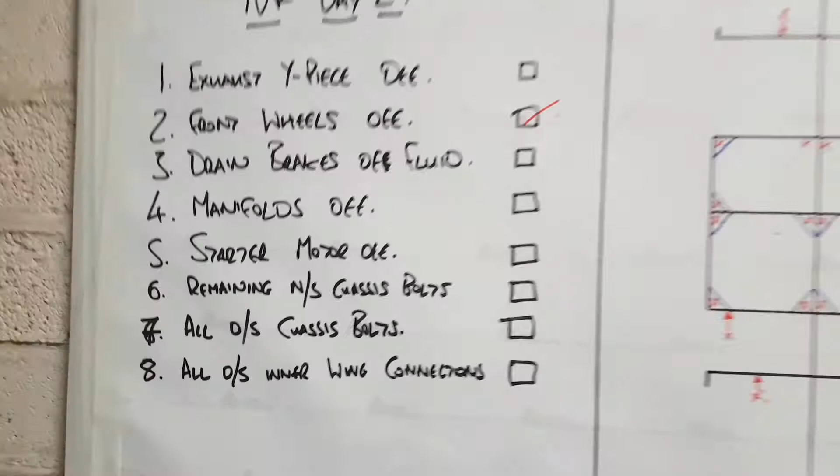So we moved on to day 2 of the TVR. Today we have a plan. I've started some stuff, just done that one. Yeah, so hopefully we should be able to get all those bits done today. Also done a chassis bolt diagram.

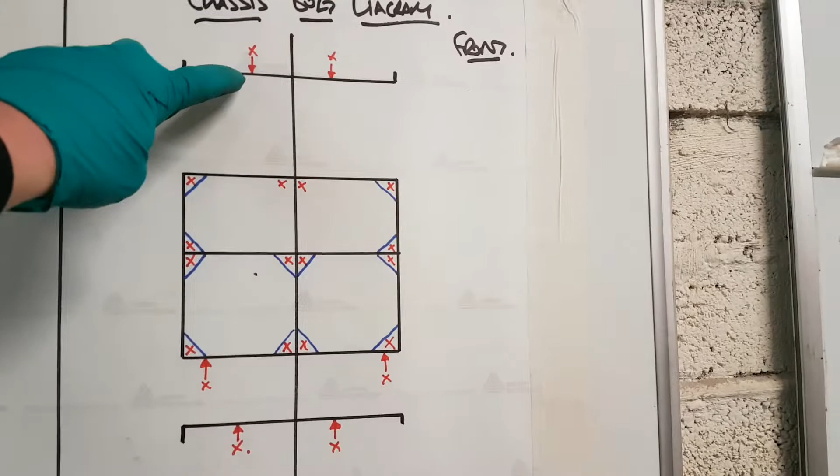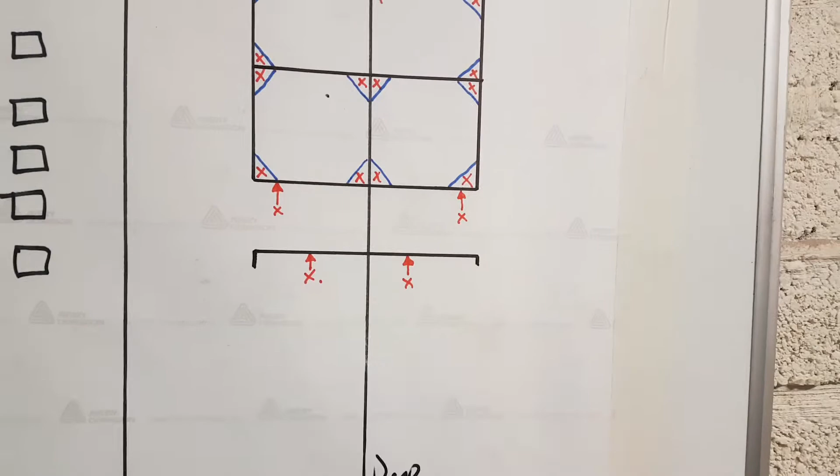So going front to back, you've got 2 under the radiator, 2 in the front of the footwell, 3 in the middle of the footwell, 2 in the back, well, not the footwell, behind the seats, 1 in the front of the rear wheel arch, obviously both sides, and 2 underneath the fuel tank in the boot. I think that's all of them. If there's any more, we'll add them to the diagram.

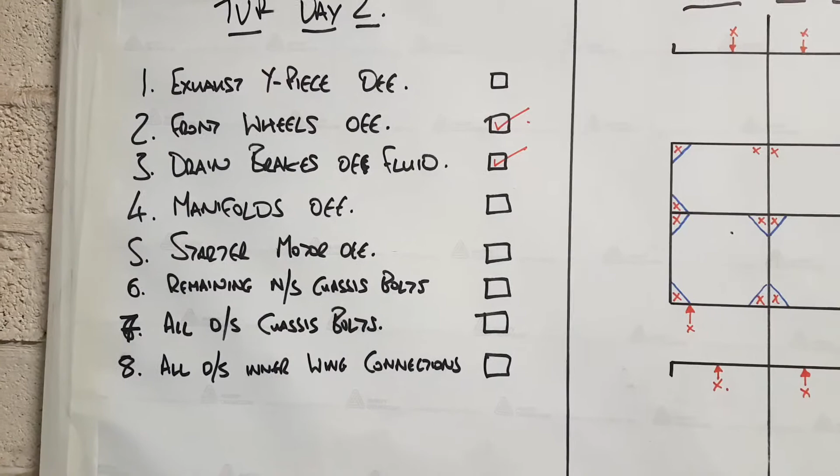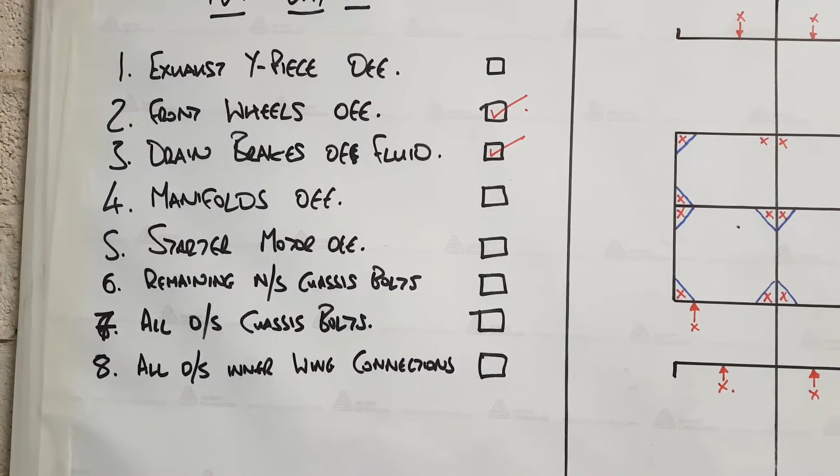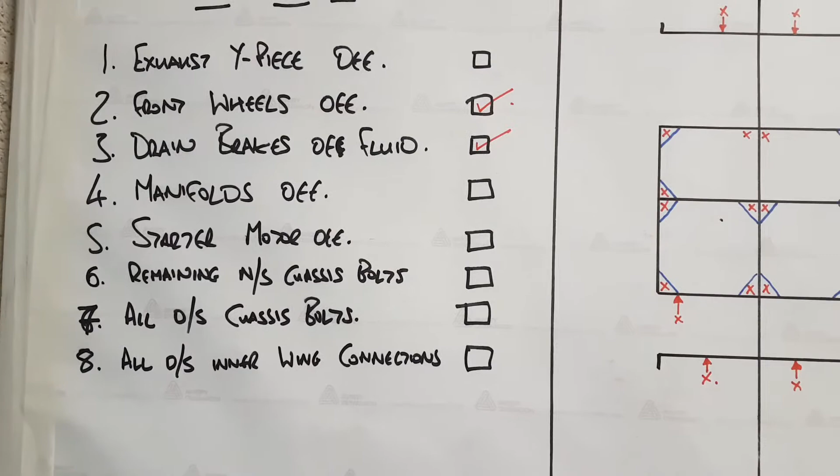So, try and do this in a vaguely logical way. Probably next is exhaust Y piece off, then starter motor, then manifolds, and then we'll move on to the chassis bolts. I did have a go, I got half of one manifold's bolts off. There's one that's a bit finicky. I couldn't find a whiteboard marker, so I just taped a piece of paper to the whiteboard. Yeah, so I'm going to plough on now and see what we can get ticked off.

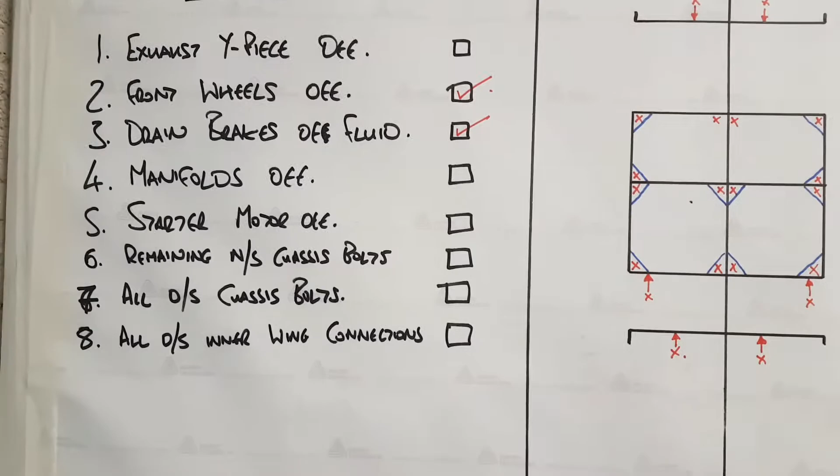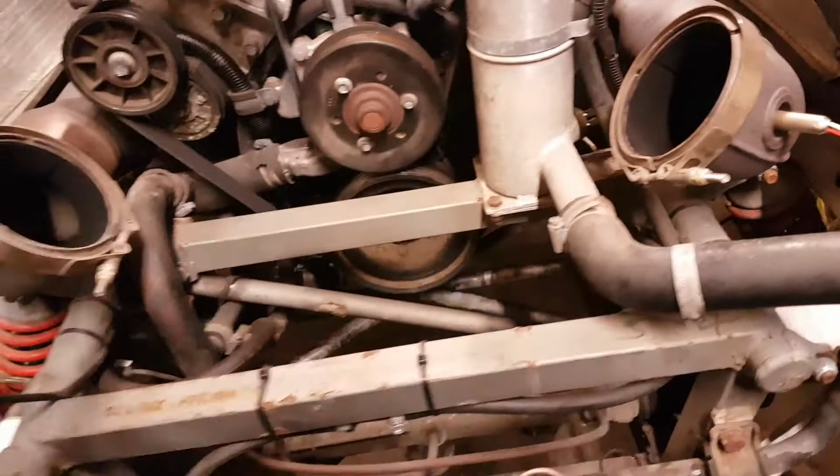Right, so we've got the Y piece off. They're just 10s on these band clamps. They were quite rusted on, I had to break the rust seal on these. I've just bolted them back onto the manifolds. I'm going to trace the wiring for these lambda sensors back to a plug, and then raise it up, take the starter motor off, and see if I can get these manifolds off then.

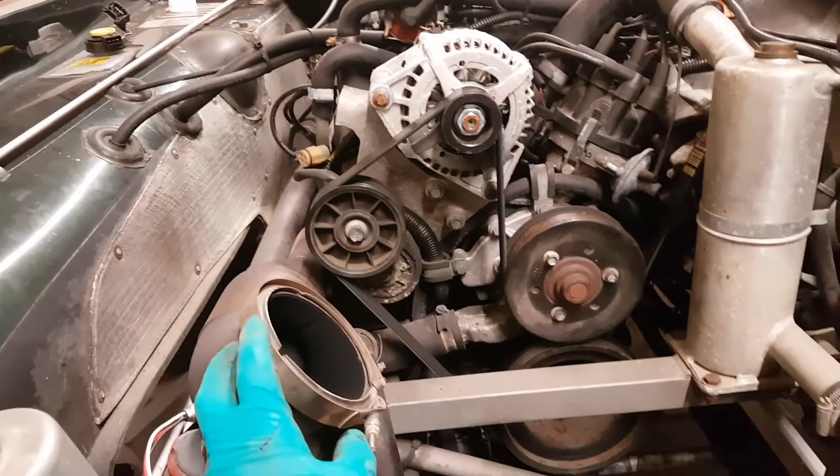Oh, there's cats in there, or something. You can't see in that one. Typically I left my torch not on charge, it's just gone flat. So I'm not rushing to do the underneath bits yet.

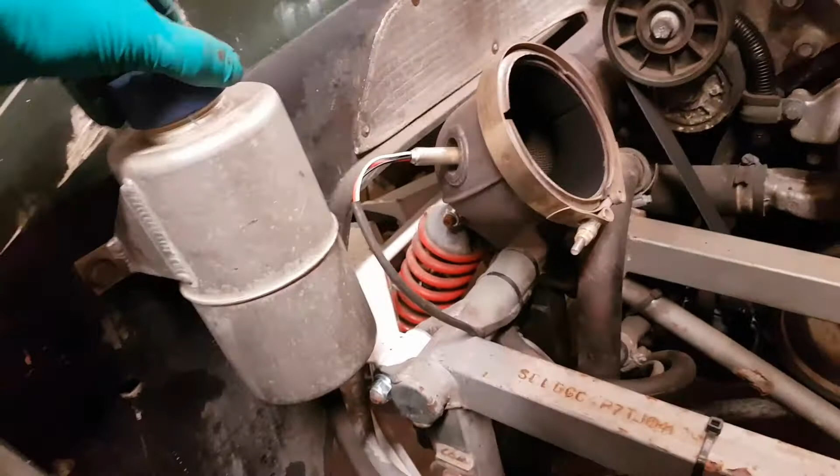This needs to come off because it's bolted to the body. I might do that now. Anything left in there? Yeah, there is quite a bit in there. Alright, we'll empty that out. Get that unbolted from the inner wing. Like I say, trace these cables to the lambda sensors, and then we'll have a bash on these manifolds, I think.

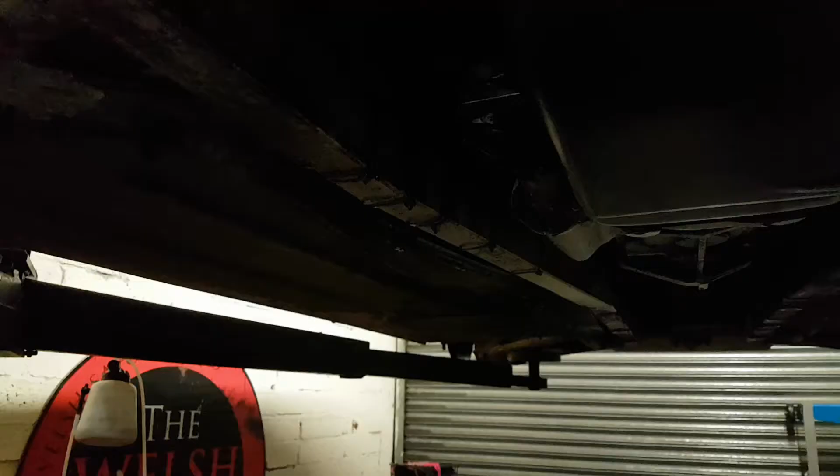Right, so we're under the car. Starter motor's there. It is 6mm Allen key bolts. We've got one main power which goes through a fuse and then goes up into the engine bay. The incoming power goes back up over the gearbox there, round the other side, and then goes to where the battery is in the footwell on the passenger side.

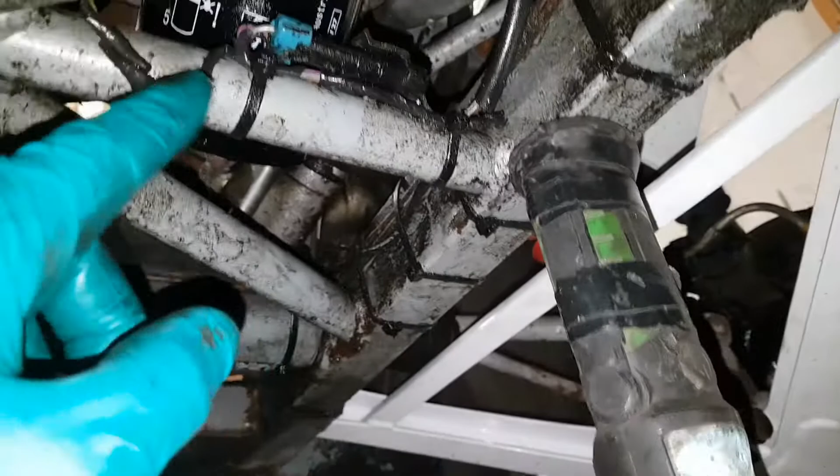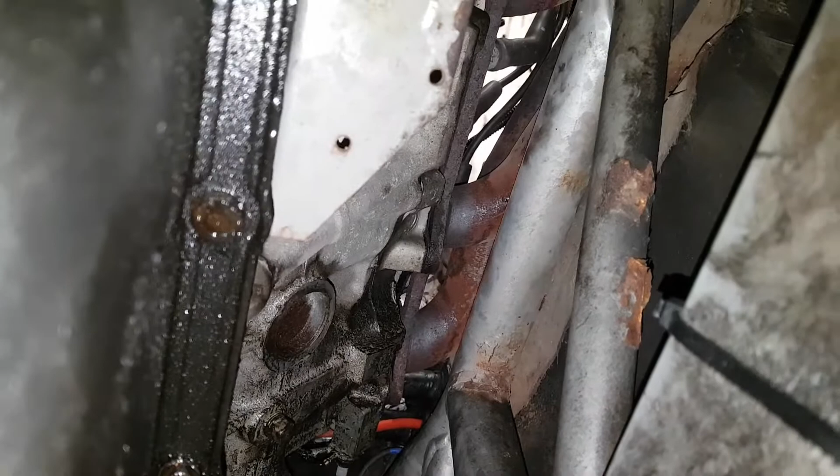I've also got one connection which goes to the pressure switch, another connection, I can't see what that one is yet. I'm going to start clipping these off in a minute. I'm going to disconnect the fuse from the plate so it leaves it as one piece. Then we'll get the starter motor out of the way, and then the manifolds you can just about see. I've got some of the bolts out of that one. Right, plod on. Oh, there's some earths on that stud there. I have to remember them.

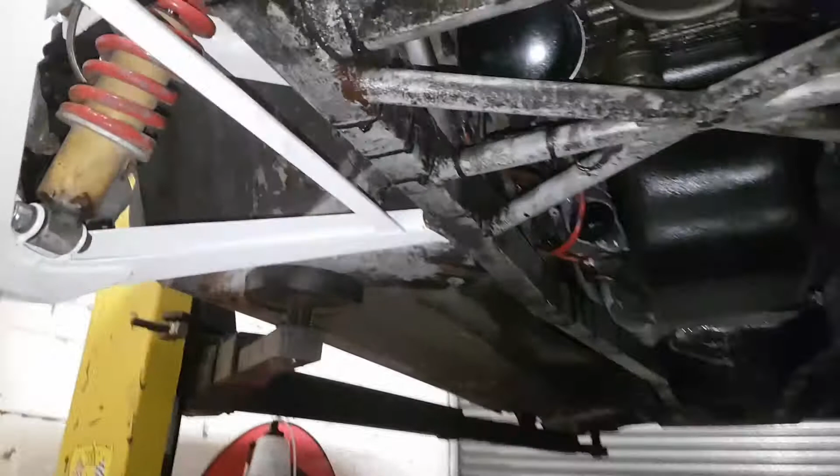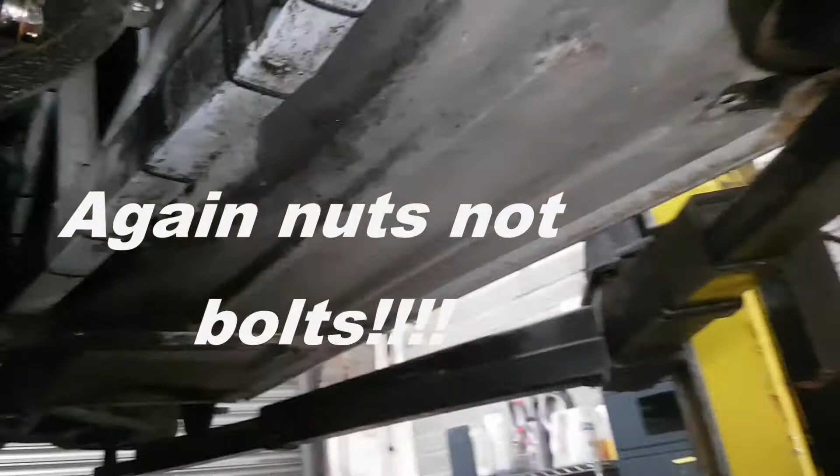Okay, so we're finally making some progress. For some reason these front nuts are not welded to the chassis, in which case you've got to have one hand down inside the footwell and one underneath, which is impossible. So I've cut all the front bolts off. This side's all out. I've got to drop it now, clean the threads off, and WD-40 them.

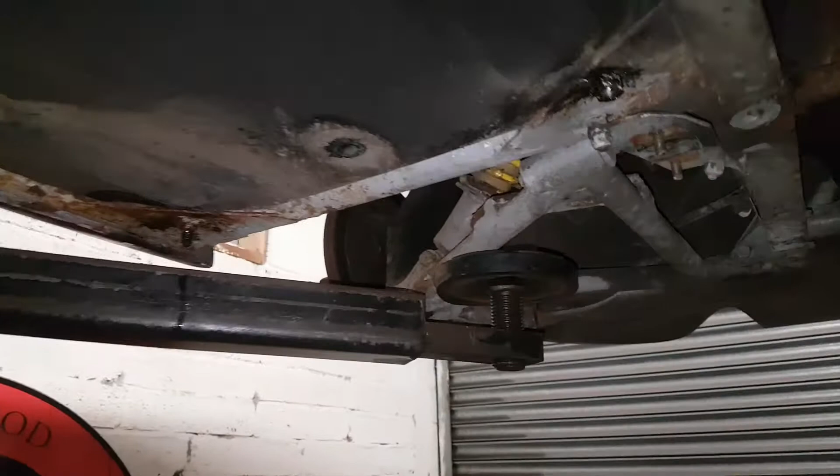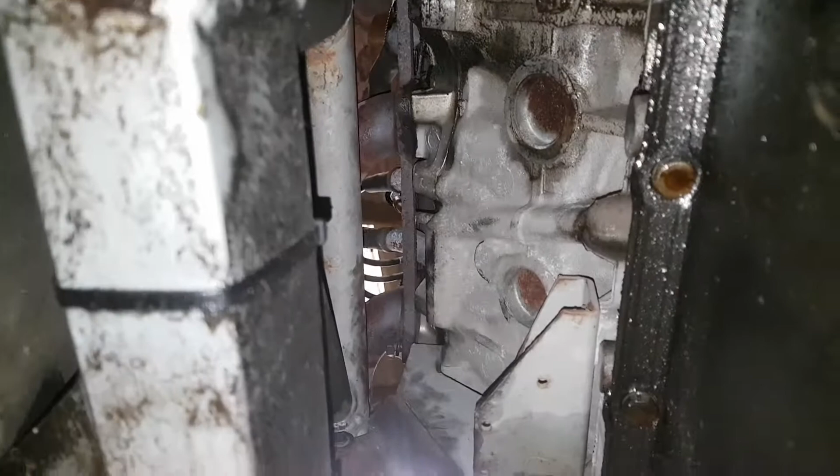So they can all come out, and body bolts out, and also I got all the bottom bolts out of the manifolds, apart from that one there, which you need to move the manifold out a bit to get out, and the same with that one there. I couldn't get this fuse off, so I've just taken the wire off it. Still going to take a long time. Don't think the body's going to come off today, but if I can do everything else on the list bar the body, I'll be happy.

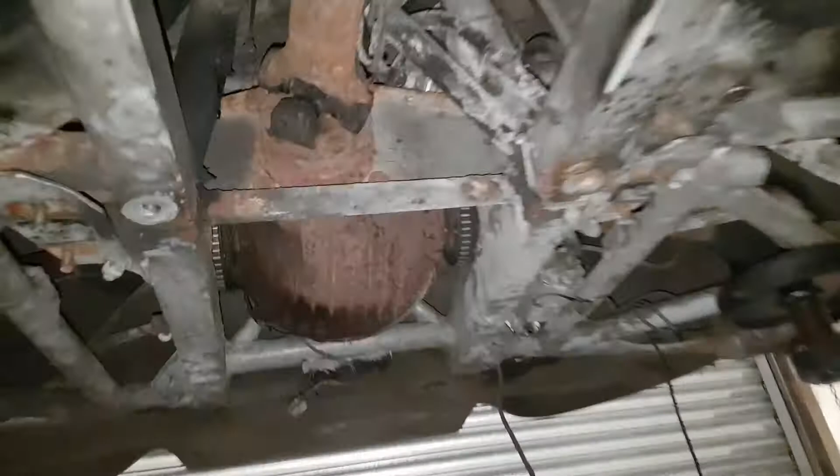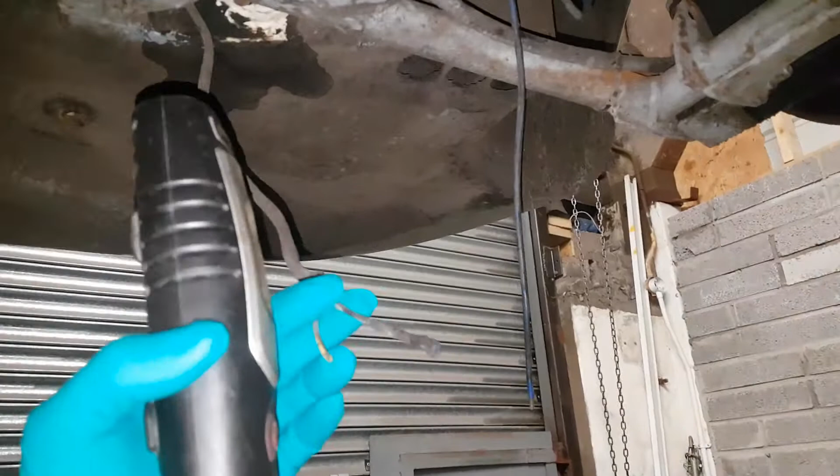Right, we're making some progress. So that is the cable to the rear speed sensor. So we just unplugged that and tied that up. That's the other end of the rear speed sensor. That's the cable that goes to the fuel pump out the boot, which I assume has been wired round because one runs to the front.

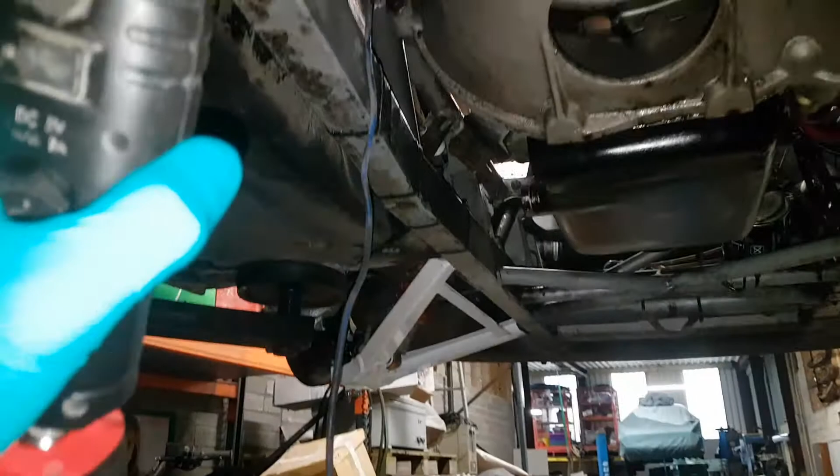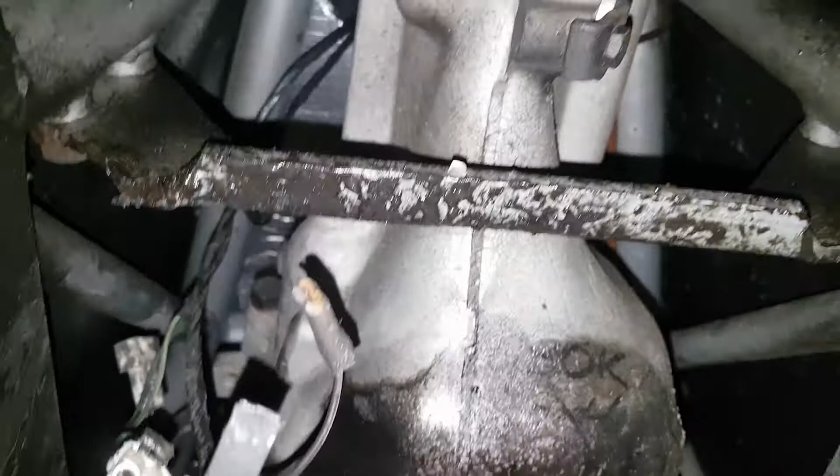Goes right the way along and it goes up into the ECU area. So I've just cut that all off. Then we've got, coming up the transmission tunnel, the switch for the handbrake, which we can now see is not working because it's pushed up the side of the, hang on, where is it? Oh, it's there. It's pushed up the side of the bracket on the handbrake cable. So that's why it looks like the handbrake's on all the time.

And the reversing switch is this one. They both come straight down the transmission tunnel. Great. I need to cut all these cable ties to release this main 12 volt power. Other than that, all the chassis mount bolts, chassis to body bolts are out, bar the front two underneath the radiator, and oh, there's 4 more which I just remembered about. I'll show you them when I get down off the lift.

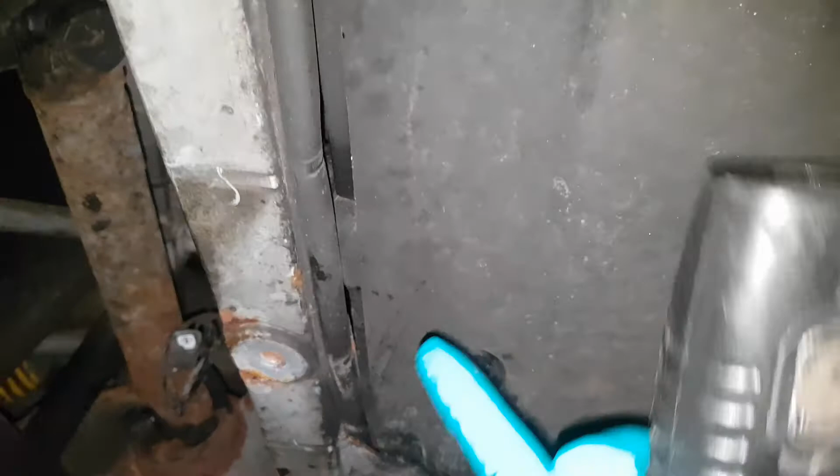I've drained the clutch slave cylinder system, so that's sorted. I'm getting dangerously close to engine bay wiring, and the final 2 body bolts. Yeah, the extra body bolts are the seat belts which go into the chassis. That one there goes that way, and that one there goes that way. So we'll get them out.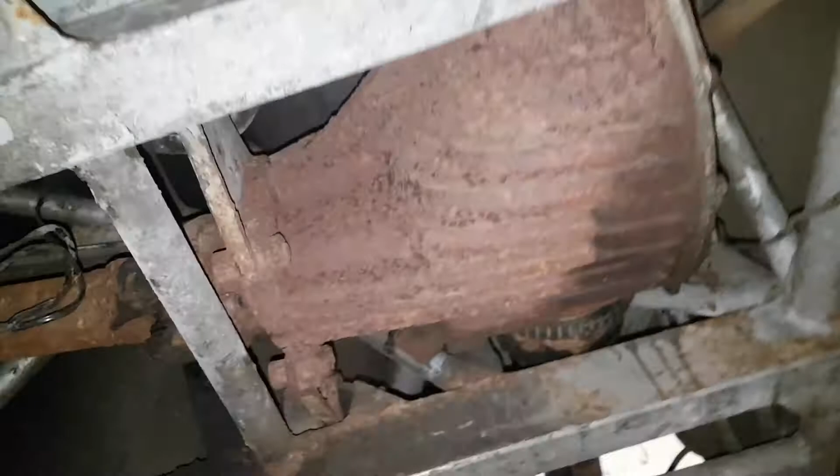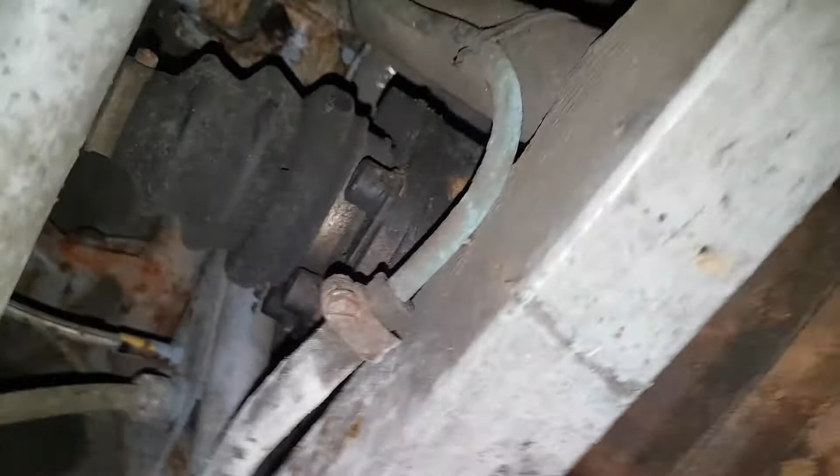And then we're into, where did the other tubes from the, we might have to split that fuel line there because that goes into the boot, and then this one is, I don't know what that one is. I've got to split that one there as well. So we'll do that now, so don't forget. Yeah, rear section's done then.

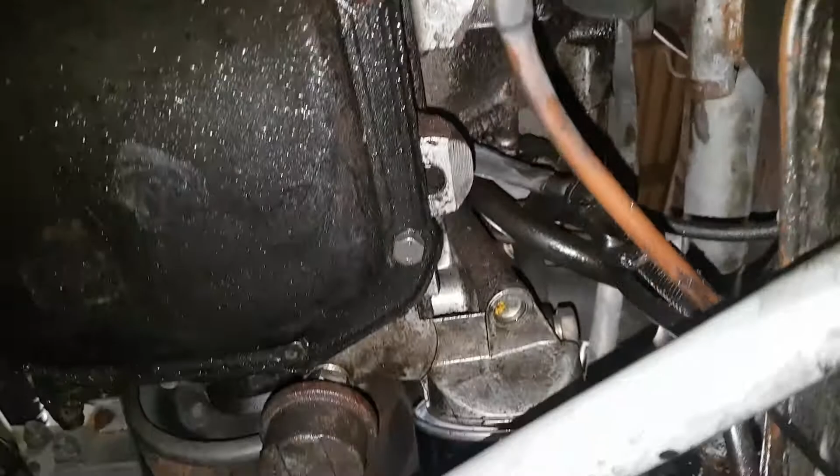Everything's disconnected for the body to come off, and then we'll move into this engine bay area, which is only an oil pressure switch. Don't know what that one is. Yeah, okay. So we're making decent progress. It's a lot slower than I hoped. So what's the next step? Oh, that manifold's off, I just got to pull it out.

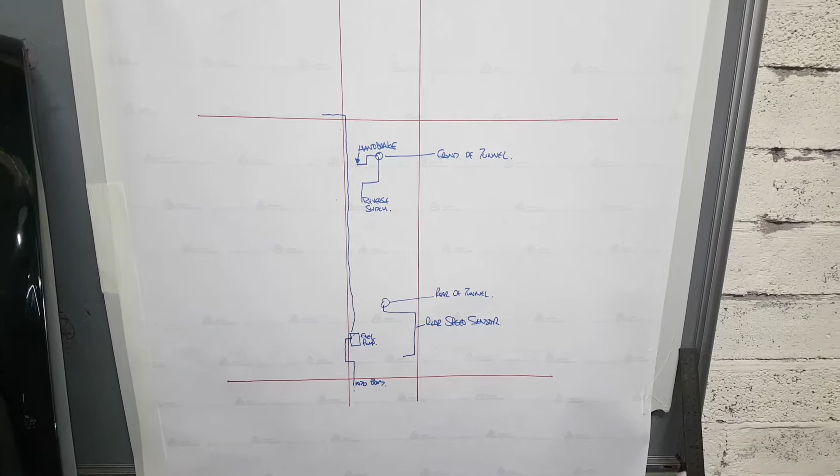So yeah, I think it's engine bay wiring, which involves taking the wipers off, cowl off, and then we'll start labelling and unplugging stuff, and then the brake pipe connections to the inner wing. Seatbelt, yeah, okay. I've started a little wiring diagram. So that just details where they've got to run, really, and where they come from. I'll try and fill in the front part when I get into the engine bay wiring. I don't think there's going to be that much, and they all look like dedicated plugs to me, but I think I will label them and make my life a bit easier.

YouTube, please don't trigger a copyright claim, the music's on in the evening next door.

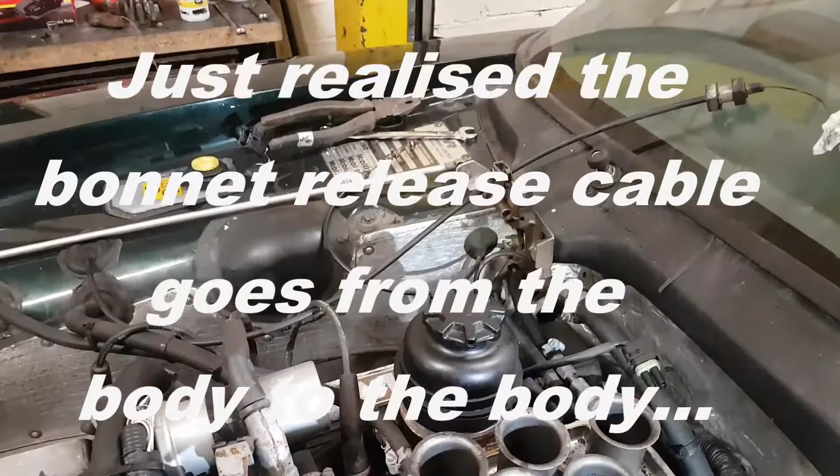Right, next bit. Now we're getting somewhere. So plenum's off, bonnet cable's disconnected, throttle cable's disconnected. There's one plug that goes to the front of the plenum, one that goes to the back of the plenum. Now we've got to get into this stuff. Also realised I've got to take the heater hoses off. Ooh, that is looking quite melty there. Have a look at that.

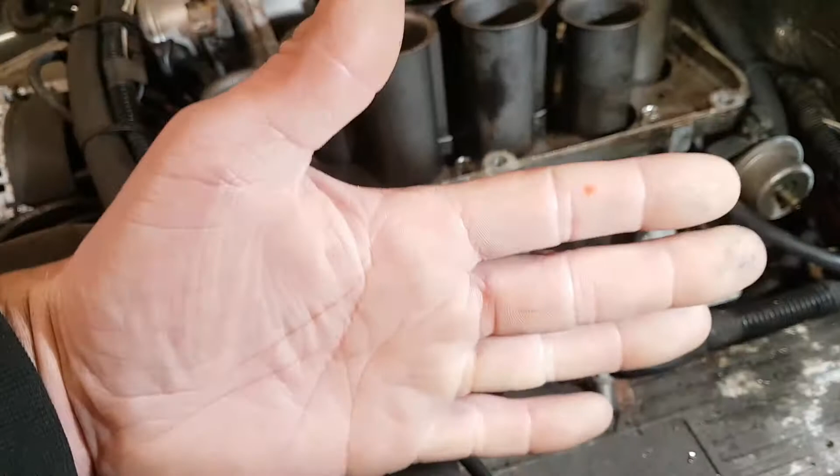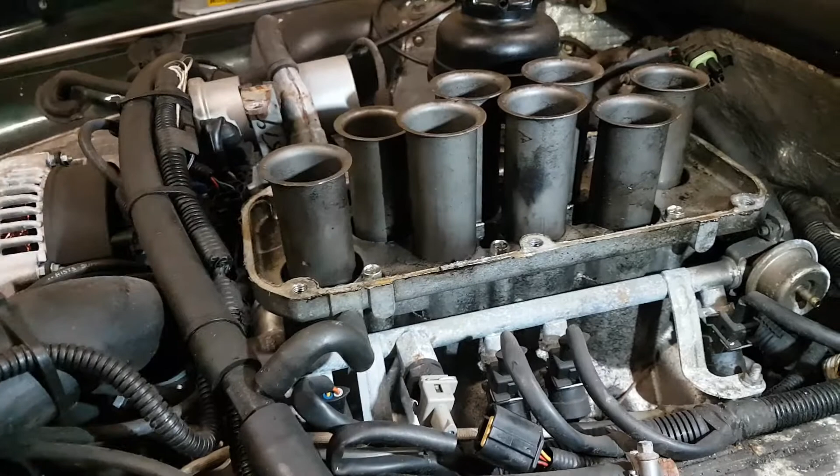Yeah, I reckon another half hour we should have everything disconnected off the engine. I want to do some labelling, obviously. But a lot of it is not, like all these injector wires are to length. So as long as I've got it on the right bank, we should be alright on those. Again, that's going to fall pretty much. Why that's got a bolt blanking it off, don't know. There was a connector on the plenum chamber that didn't have anything on it. Let's try not to worry about that too much.

So yeah, what I need to do is label wires like this one, which comes up here, and then basically start stripping the loom back out. I might take these breather tubes off, just so I can see what I'm doing a bit more. Yeah, so I'm just going to label everything I can on the wiring now. And once that's off, got that expansion tank off.

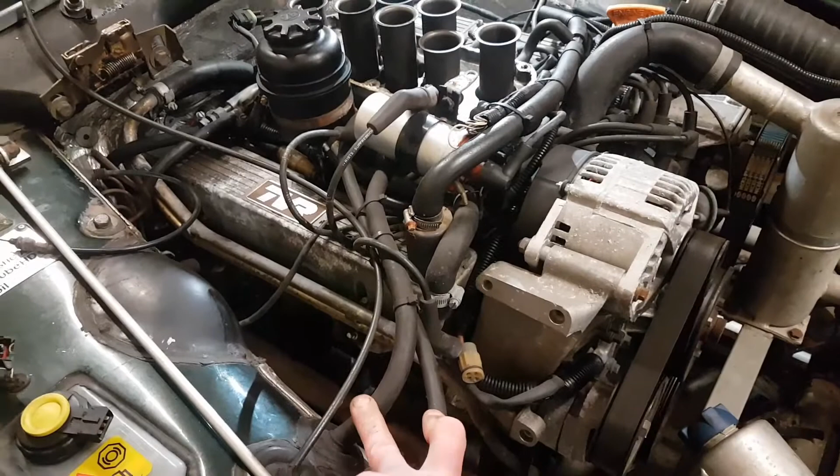Disconnect these breather tubes, which I presume are vacuum. That one's the throttle cable, so that can stay with the body now. Tubes can stay with the body now. That I assume is if you've got air conditioning, which we haven't. There's a connector. I don't know where that goes. Oh, it'll be a crank sensor, I would have thought. And then onto those brake pipe connections. And then we're not far off our list for the day. Then, tentatively, do we try and take the body off? See, I'd like to get some movement today if I could. Perhaps.

We'll come back. We're getting somewhere with the engine bay wiring. Basically on this left hand loom, you've got the extension cable that goes to the lambda sensor. 1, 2, 3, 4 injectors. Grey plug is the fuel rail pressure sensor. Brown plug goes to that temperature sensor there. And there's also one single cable which goes down underneath the distributor, connects to something there.

So yeah, that's this left hand, oh, and then that's the MAF. So that's this left hand setup gone. We now need to disconnect the heater tubes, disconnect the fuel lines, disconnect the brake pipes, and then see if we can work out where this goes. Oh, that's right, okay, that goes to the expander, so I'm on the wrong side then. Oh no, I didn't draw that in, that's okay.

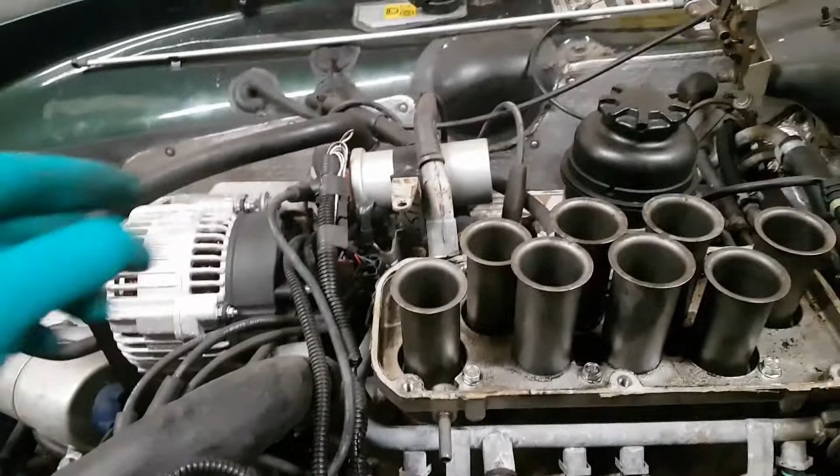Yeah, so now we're going to work backwards. If that's the distributor, might be able to leave this on and just disconnect it at the coil. I don't know, what is that? Anyway, we're plodding away. Disconnect more stuff. And we're back, y'all.

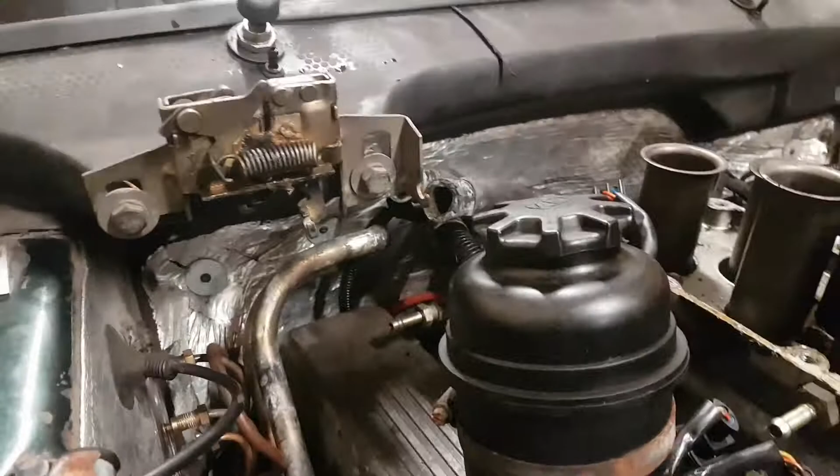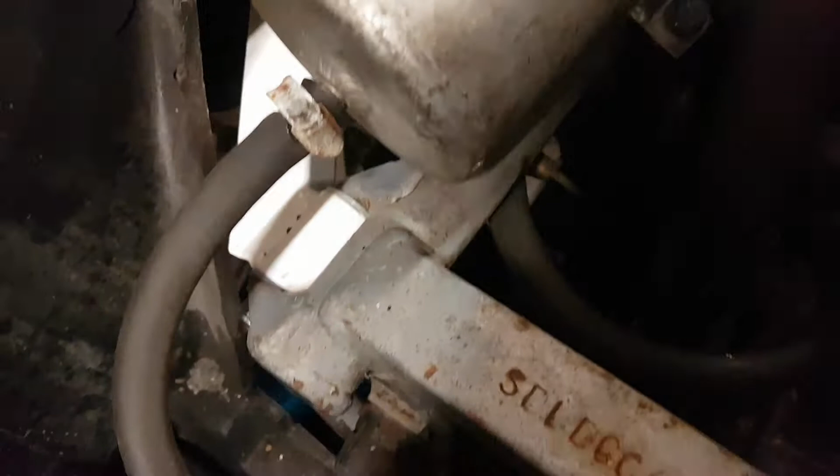Now we're getting somewhere. So all those brake pipes there, disconnected from the body. Heater hoses are off. Front body mounts are out. Mount bolts should go here. But remember, there's a big earthing point on this one with two massive earths, which I think is the lights and horns and stuff on the front.

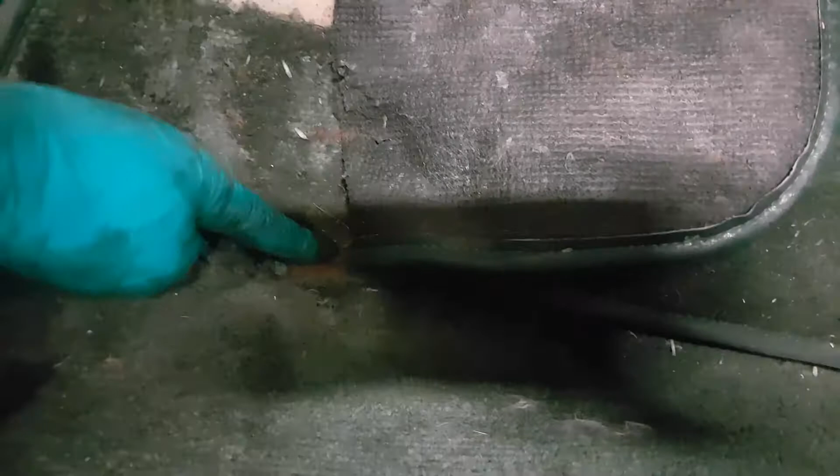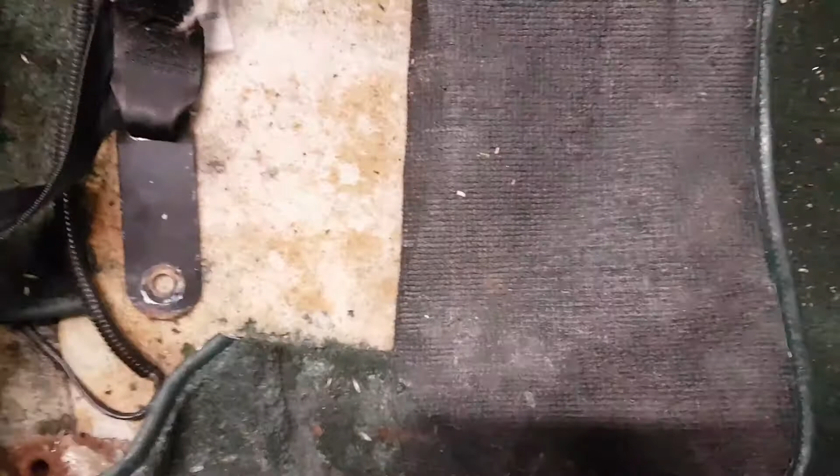I need to go underneath, right, one bolt sheared, which is going to be a problem, which is the seat bolt on this side, and it's sheared almost flush. So the body needs to come off this bolt, that's going to be in the way. So what I'm going to do is cut it from underneath and repair the body later. So I assume there's a metal, must be a metal insert. Where's my torch gone? Yeah. Anyway, there's a metal insert, so I'm just going to cut it from underneath. Then that's off. So that's all body mount bolts are off now.

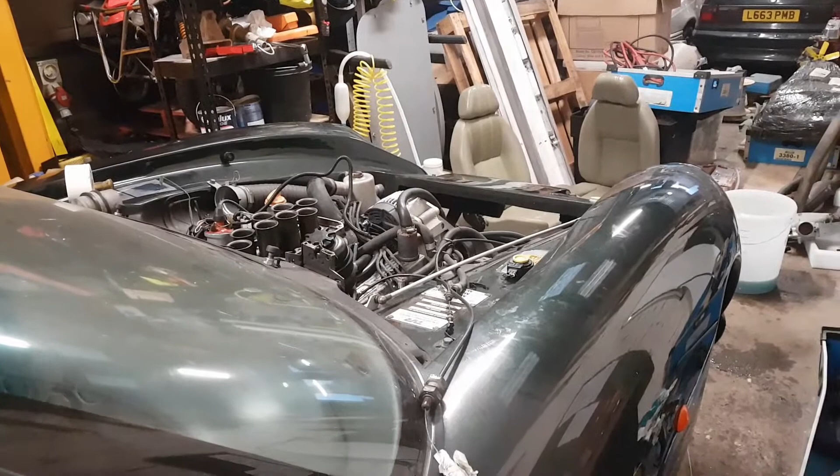We've got to go underneath, disconnect the oil pressure switch, possibly oil level, but I don't think it's got oil level. And a bit more engine wiring that comes from underneath and then comes forward and up. And I have to go back through the list. But stuff like this, I just mounted on the, that mounted then.

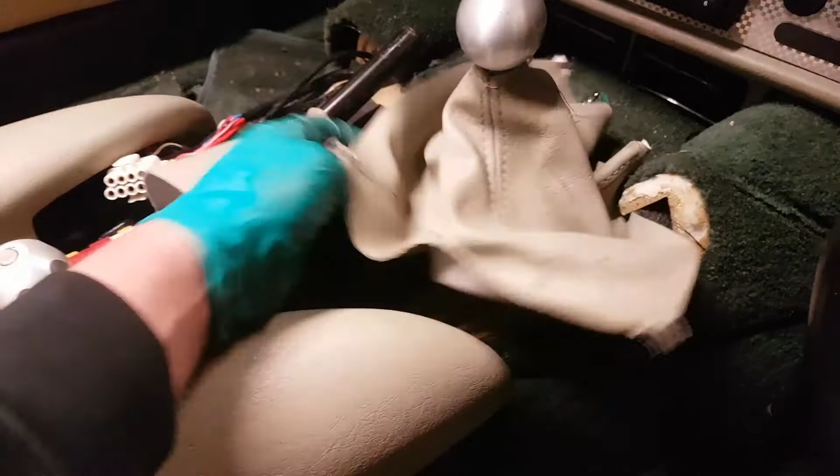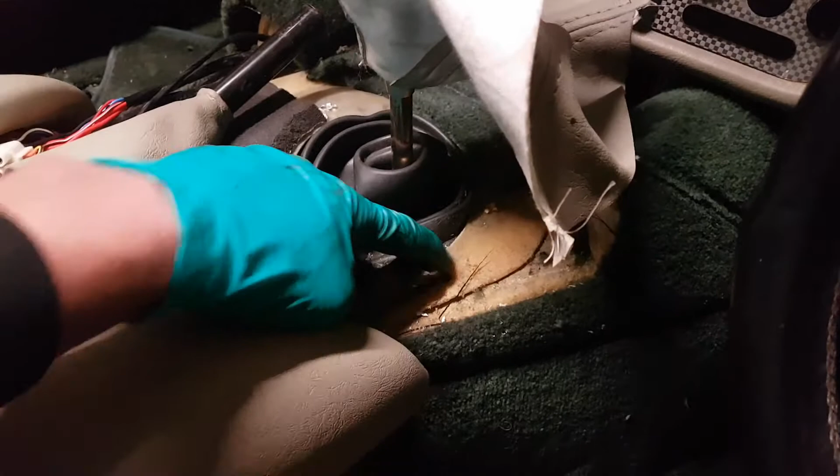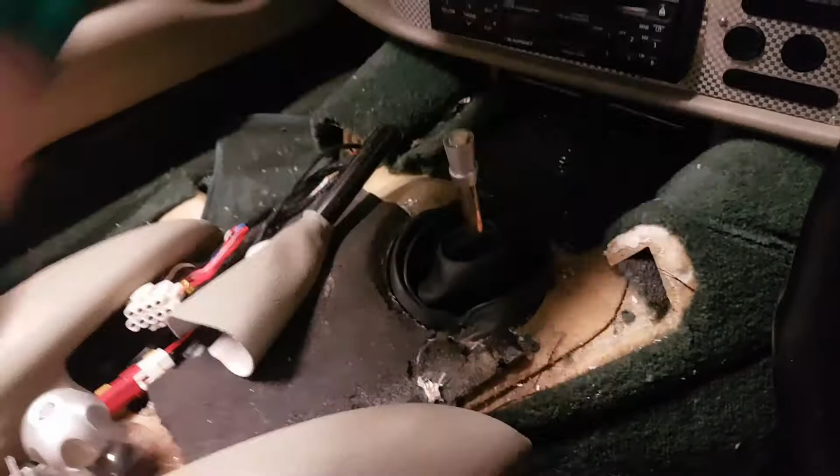Oh, beige leather's great with greasy hands. It looks like it's sort of pop riveted somehow. I think what we'll do is put clean gloves on and take the knob off. Does that come off? Yes, it does. Perhaps. Yeah, there we go. So we'll leave. That'll slide. Take that off as well. No, don't know what that is. That'll just slide up and off now, so we don't have to mess about with that.

The handbrake. I need to disconnect the handbrake cable so the lever can come right the way up, so it's straight, and then it can drop through the body. I think we're at the stage. Oh, don't want that there. Where it's going to be. Oh, and I forgot this bit.

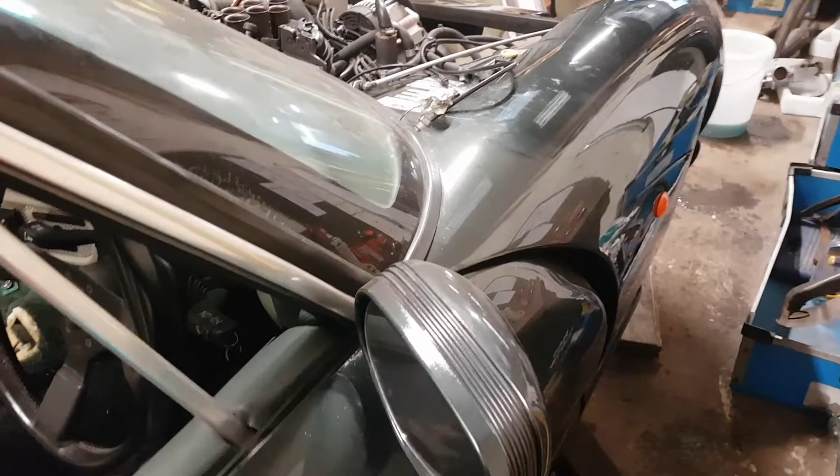No, that bit. And even the guy, he wrote a guide rather than doing a video. He said when you take the body off, it will make some horrendously horrible noises, and you will have forgotten at least 5 wires. So that's my target. If I forget less than 5 wires, I figure I'm doing alright. We can always fix wires. Oh, that's a good design. If you fold the mirror in, it's the body. We can always fix wires. We can always fix fiberglass. So I'm not too concerned. There's a bit more engine wiring, but like I say, I think there's a bit underneath.

So we'll get it back up in the air, cut this bolt, this seatbelt bolt, disconnect the last of the. I'd like to see it move off the chassis, even if it's only an inch today. I'll be happy with that. So it's getting a bit late, still light, because it's not middle of winter now. Starting to get to the point I need to pull the spark plug. Oh no, I don't. Do I? Probably need to pull the spark plug leads off so they don't snap on the way past. And then, yeah, by the last of the wiring, we're getting towards rocking.

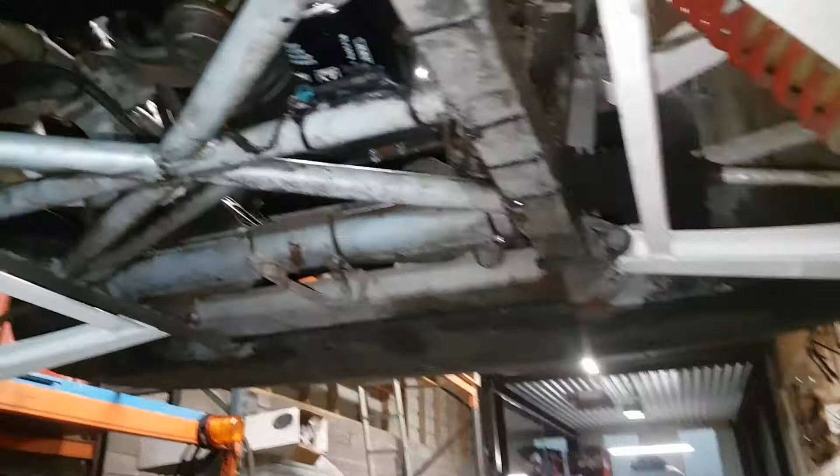So this is our seatbelt bolt I was having problems with. See, the bolt comes through the body into the chassis there. I've only got a 4.5 inch angle grinder, which, even with a brand new blade, I couldn't get right the way up in there. So what I've done is notched the chassis so the body of the angle grinder will go up in there and just hit the last bit with a chisel, and that's gone now. So that is the last of the body mounts, and now I have to. Oh, that is it. Okay.

Alright, that's the wire that comes from the top, which goes onto the fusible link. So we've got pressure switch. Basically, I've got to cut all these cable ties so I can feed the wiring upwards. And this is okay to just go straight up. That's okay to just go straight up.

There's a big earth there, which I'll try and get off and leave this one attached to the chassis. And actually no, I don't need to get that off because the engine's staying on the chassis. I do need to get this off at some point because this part is going to be replaced. Ah, steering shaft, I forgot about that. So yeah, we need to get that off as well. Yeah, actually quite a bit more than I was thinking. Bugger.

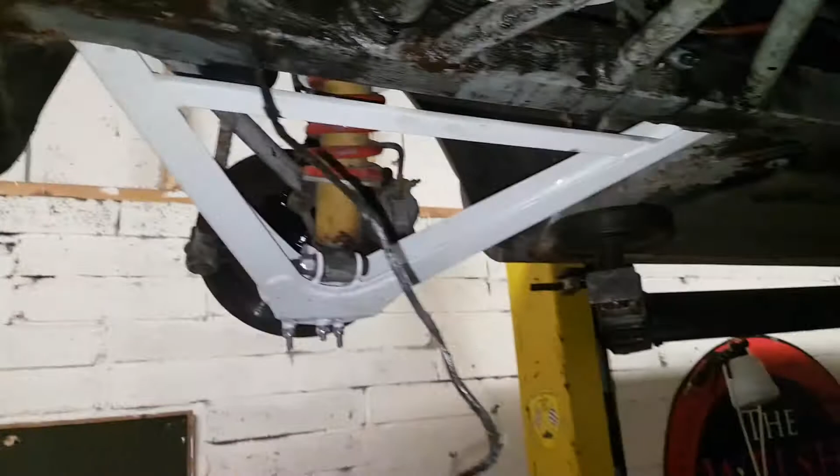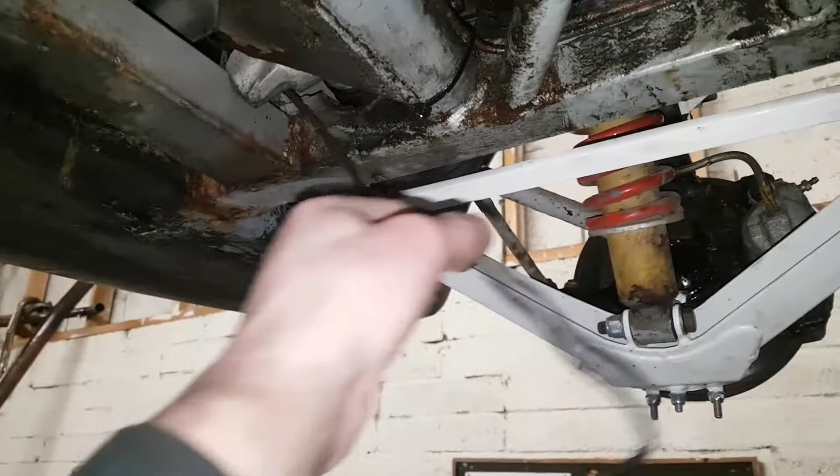Alright, so that's most of our connections done. Oil pressure switch seems to go forward on our little wire. Well, it goes forward on that little wire and upwards on this wire somehow. So we've got to get the loom up this side. That just goes forward into the front cavity.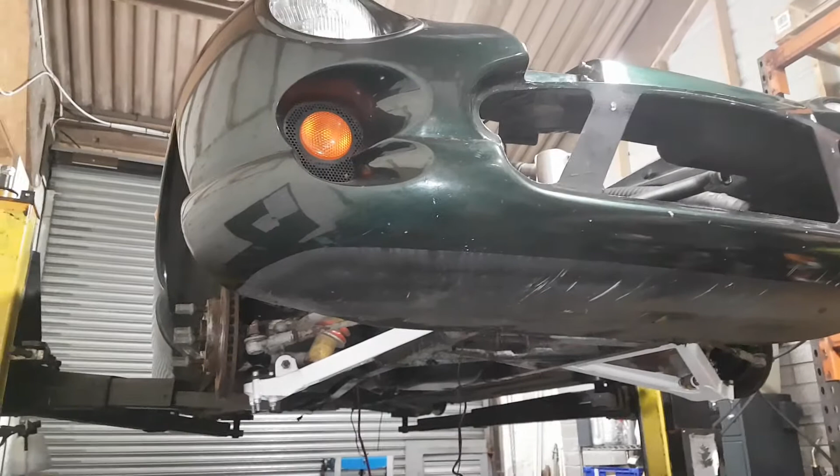So I've took those earths off that stud at the back there, that one. Unless there's something drastic that I've missed, which is entirely possible, we should be just about there. Oh, and these supposed bolts in the transmission tunnel. Not sure about that. Okay, hopefully we might have movement, possibly.

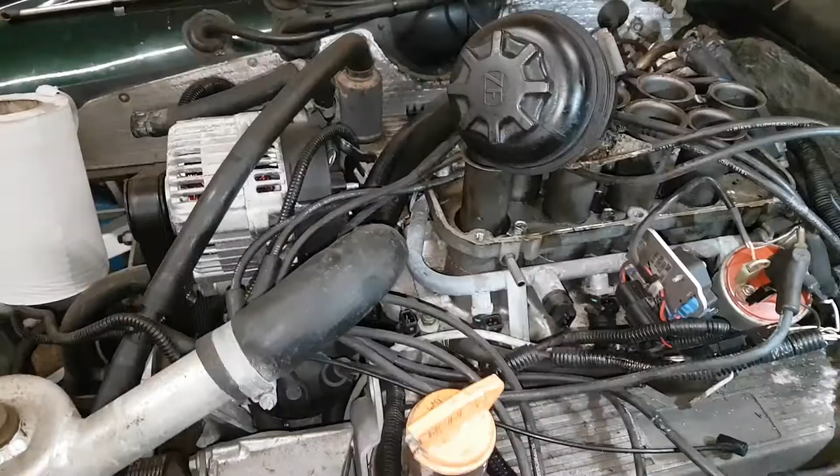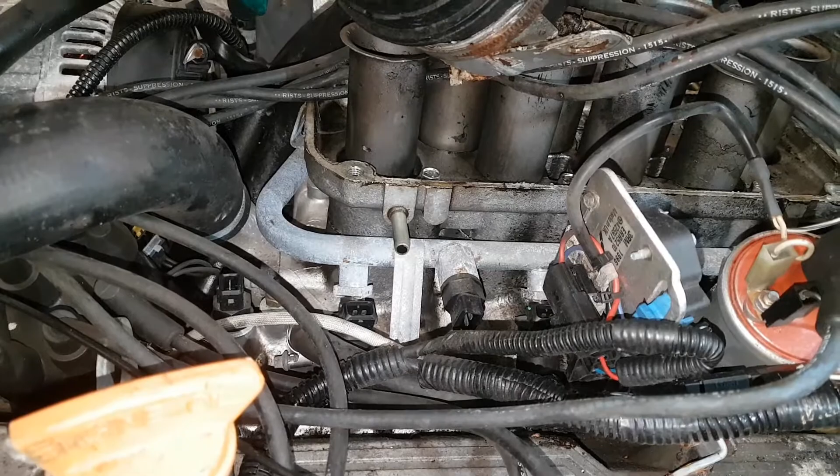Okay, so the wiring comes across from the driver's side, picks up the distributor, then for some reason is on a really long cable, which then loops and goes back to pick up the coil. And the coil has got one multi-plug and black and white wire going to the coil. Positive is the black, white, and then this module is separate, I think. Oh, where's that come from? Oh, that's come off there. Okay. So yeah, black is positive, white is negative.

Then I should be able to feed this loom through. There's still one earth point on the other side I can't find yet. These are all up out the way. I'm going to tape these together. That's all loose. That's the part that's going to take a bit of feeding when the body's coming off. Yeah. I would say we're getting to the point of no return, but we passed that quite a few days ago.

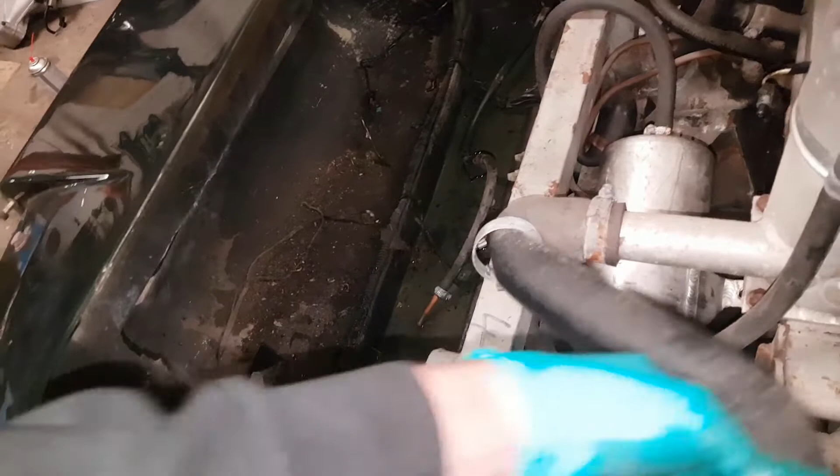Oh, fuck off. How is there still water in it? I think I might take this connection off, because otherwise that overhangs the body, and it's not too bad actually. I'll just do that. Then even more water will come up. Shit. Ah, that's better. Hook that under there. Right, disconnect this, feed them across, come up against the next problem.

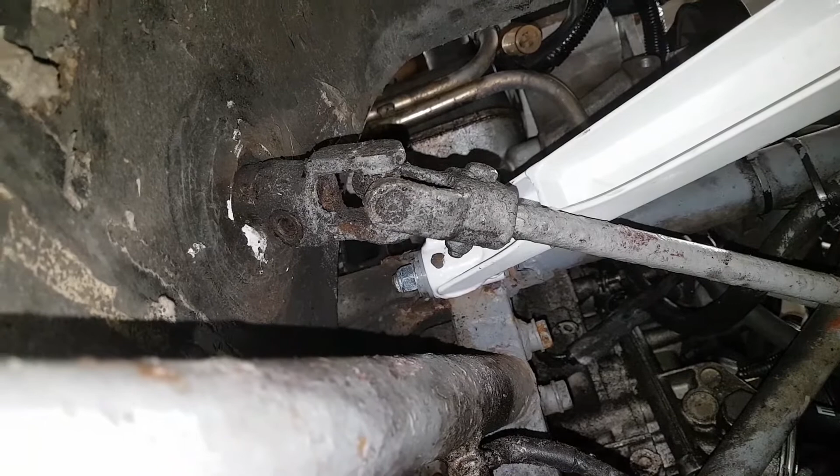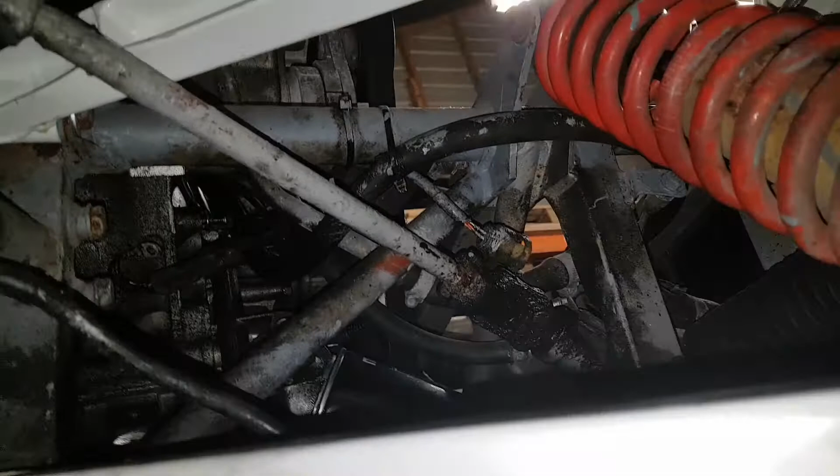Right, this engine is going to be a nightmare to rewire. See that bolt there? That picks up the earth strap from the chassis, which goes onto here, and also a loop of earth go up into the loom. I've forgotten about the steering shaft, which I've got the nut out of, but it doesn't seem very keen to move at the moment. It's also rusted to crap. And that one's already covered in oil and stuff.

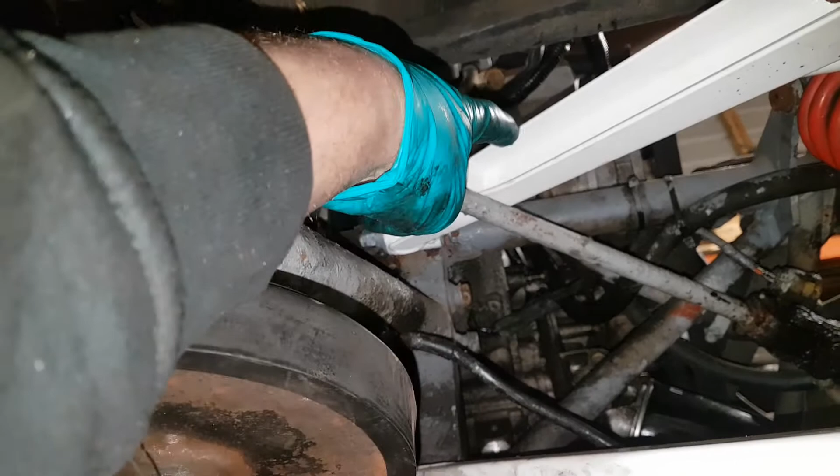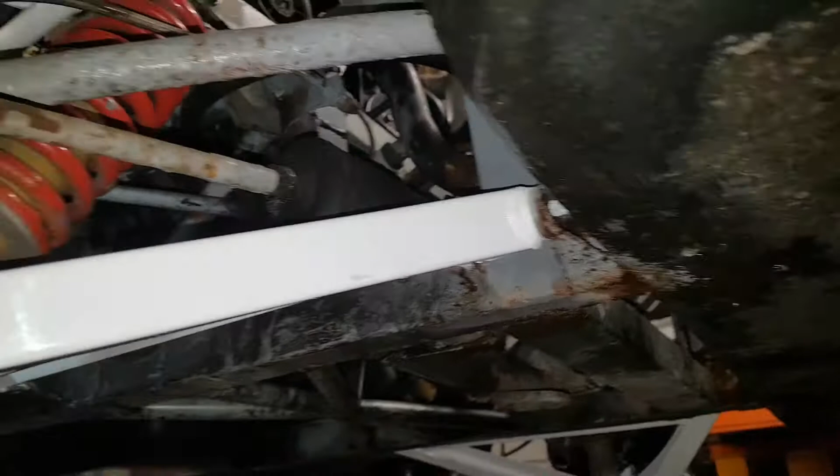That's me done for one night. This is pretty much what I've got it to move, about 1/2 inch. I need to slide this universal joint off. I've got it split with a slitting chisel. And it's absolutely dripping in WD-40, so I'm going to leave that overnight, let that sort itself out. Other than that, all the engine bay electrics are undone. Need to put that torch on charge.

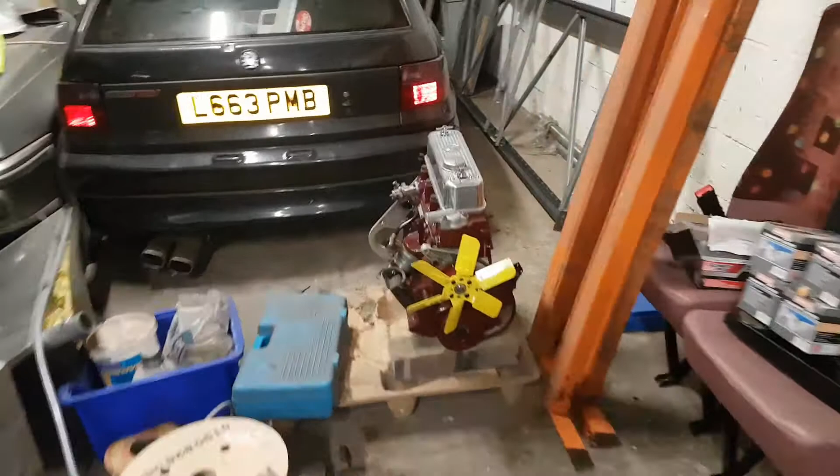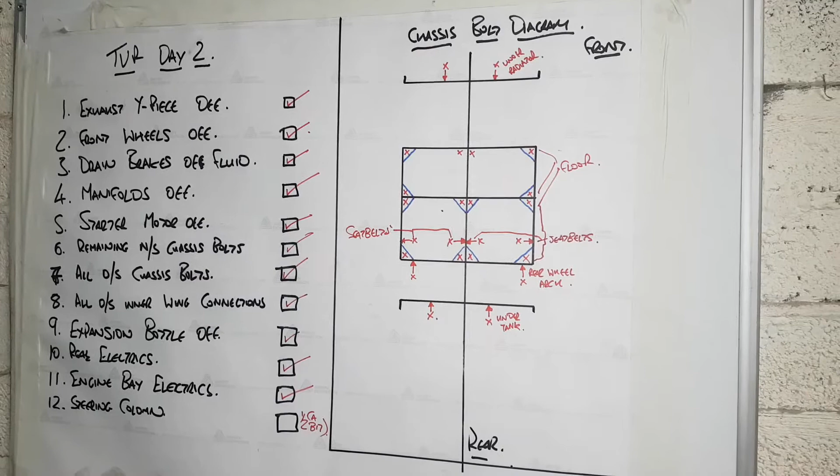We haven't done too bad, but it's still a mess on our list. So the only thing we haven't done is steering column. All the chassis bolts are out. So yeah, we'll take that as a pretty successful day. Afternoon, it's 8:30 now. Yeah, probably about 8 hours really of just plugging away at disconnecting this and that.

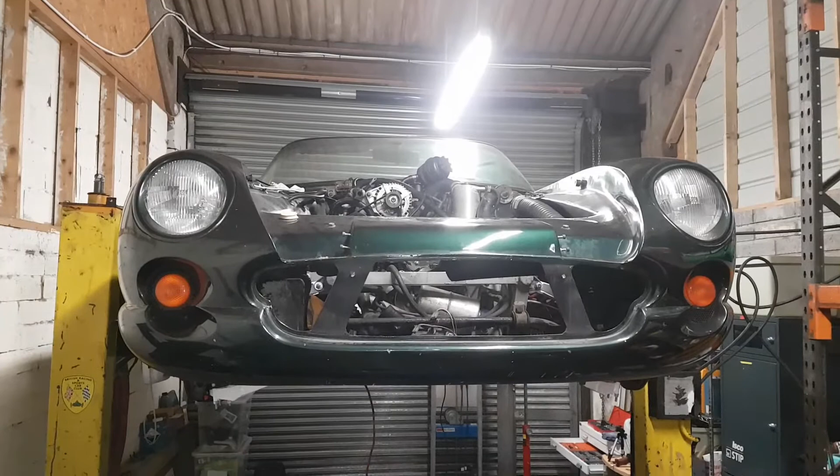So, I'm not working tomorrow now. So, I don't see any reason why this can't come off tomorrow. So that might be episode 3, the big day.